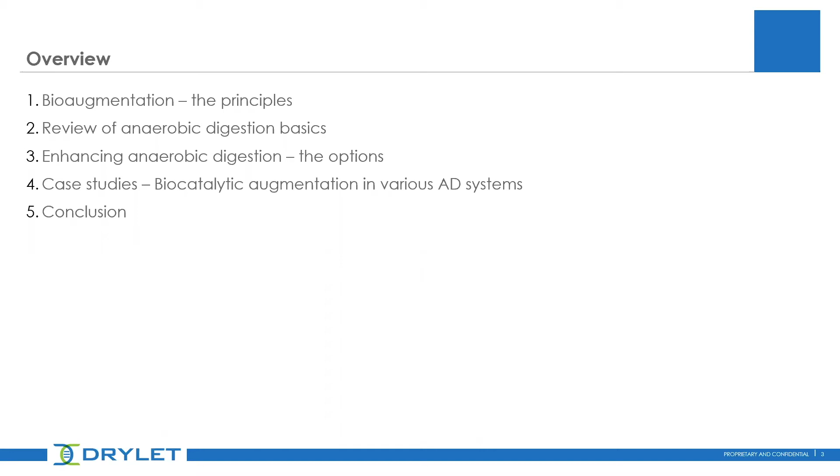The biological remediation of waste is fundamentally the most widely utilized approach for dealing with organic contaminants. Whether we're talking about wastewater treatment or digesters, fundamentally we're starting with a carbon-based waste. If you think about a typical feedstock going into a farm-based digester, it would essentially comprise undigested foods coming from the intestines of an animal, bacterial cells from within the gut, and things like straw, bedding, and feedstock materials that have not been degraded. What's common to all those materials is that they are carbon-based.

All of the carbon-based material that goes into a biologically remediated process relies on microbes to be degraded. In the context of anaerobic digestion, we take the carbon-based waste, expose it to microbes, and in the absence of oxygen, roughly 30 to 60% of the organic material provided is converted into a gas. So for every 100 pounds of feedstock provided to a digester, about 30 to 60 pounds equivalent will be converted to biogas.

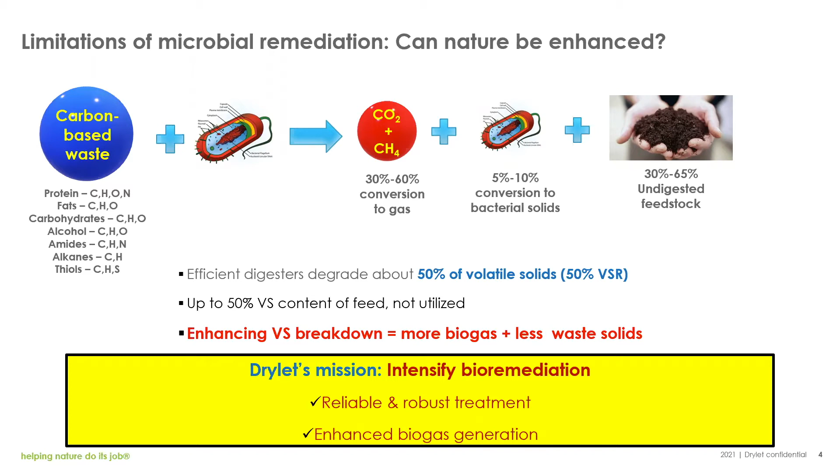So our mission at Drylet has been to fundamentally find ways of intensifying bioremediation, and doing that in a way that ensures we still have reliable and robust treatment while also getting benefits like enhanced biogas generation.

And the need for such solutions is immense. So if we think about the entire gamut, the entire scope, the entire field of sectors that require solutions to the significant amount of solids that they have to deal with.

We're talking about almost 40 billion gallons of wastewater being treated daily, generating roughly 65 billion pounds of sludge. And if we look at the livestock side, there's over 6 trillion gallons of manure, both from swine and cattle, generated on an annual basis.

So finding ways in which we can do more with those solids, break down more of those solids, and make our digesters more efficient and effective would be extremely significant—not just in helping us generate more biogas, but also in providing options for mitigating, reducing, and better handling the significant amounts of solids generated through all these processes.

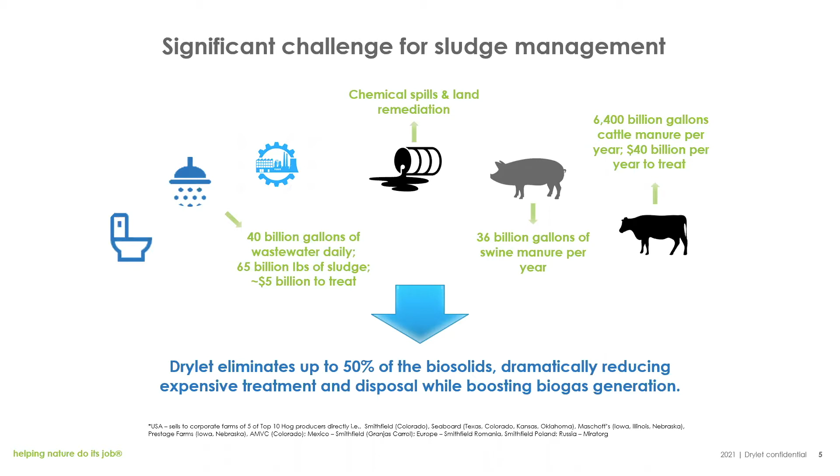If we look at a typical microbial system, there are 8 factors that determine the type of microbes we have. Those factors include the food, which in the context of a farm-based digester we might really have no control over, because the food we get is essentially the waste coming from the animals.

If we think about one place where we could have control over the food, it might be in a brewery, for instance, where we can actually go buy hops and determine exactly what we want to put into the digester, having remarkable control over the food going to the digester.

But in most of the applications I'll be talking about today, we're basically dealing with waste—whether it's biosolids from wastewater, feedstock from digesters, or mixed waste systems taking part feedstock from animal production and things like fats, oils and greases that are then fed to that digester.

But those factors again include the food, the temperature of the system, the hydraulic retention time, and the sludge age, which in many digesters, if they are well mixed, might be the same. So in a well-mixed digester, both the liquid and solid streams spend exactly the same amount of time in the system.

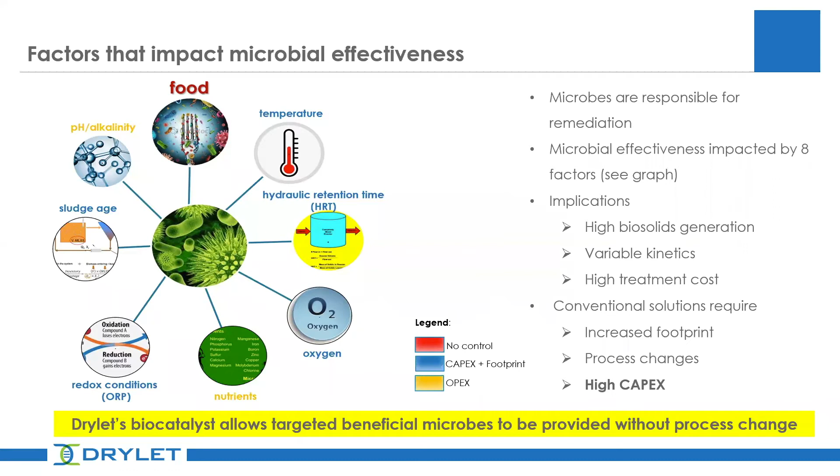That entire process of improving what is going on in a microbiological system, like an anaerobic digester, is called bioremediation. There are different types of bioremediation, but what we'll focus on today is a particular type referred to as bioaugmentation. Drylet's particular focus is on cellular bioaugmentation.

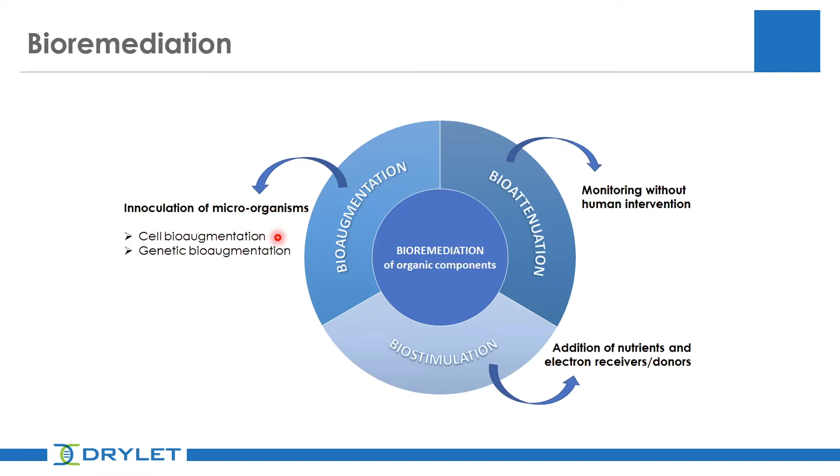This is taking materials found in nature, microbes found in nature that are not modified in any way, and then presenting those microbes on unique platforms, which we'll talk about as we go forward, into a biological system like an anaerobic digester, ensuring that those microbes are viable and provide us with the outcomes we're looking to have in the system.

In principle, a wide variety of microbes can be bio-augmented. So for instance, in a digester we have fermenting microbes that take the waste we put in, break it down, and convert it into volatile fatty acids, which is an extremely important step in the digestion process.

We have methanogens, a unique set of microbes able to take volatile fatty acids, hydrogen, and CO2, and convert them to methane. We have lipophiles, a class of organisms laser focused on breaking down fats, oils, and greases. So just a wide variety of different types of organisms that we could, in principle, load onto a platform and introduce into a biological system.

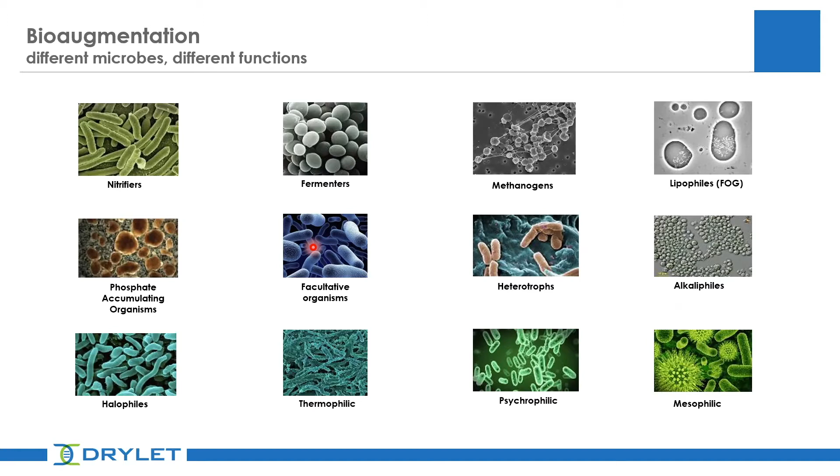Now, if we take microbes that might not be native to a biological system and introduce them into that system, there are three fundamental challenges we have to overcome. The first challenge is: how do these microbes get access to food?

I'll give you a few examples. In a typical digester generating about 250,000 cubic feet of gas a day, that digester might be fed with hundreds of thousands of pounds of solid material. We would typically be dosing into that digester no more than about 10 to 20 pounds of microbes on this platform daily. So how do we enable a very small amount of microbes going into a system with significant quantities of other bacterial cells? How do they even get access to food?

As we'll talk about in subsequent slides, a typical digester dosed with the Drylet Biocatalyst might have about 10 to 20 parts per million of material. When a digester has 2% solids, that's basically 20,000 parts per million. Many of our digesters have as much as 5%, in some cases 7% solids—a 7% solids digester is 70,000 parts per million. So how do we take 10 parts per million of microbes we're dosing into the system and have them compete with 70,000, 20,000, or 50,000 parts per million of other microbes in the system? How do they get access to food?

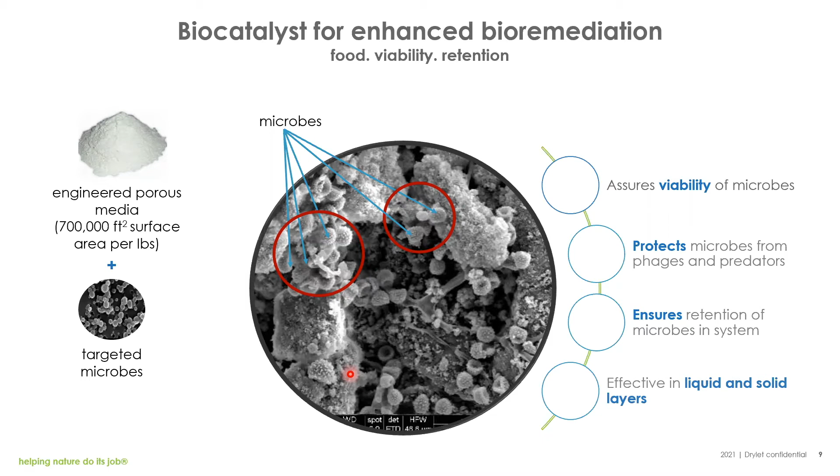If we have a separation between the hydraulic retention time and the solids retention time, the solids retention time tends to be way longer than the hydraulic retention time. This means we're able to retain these particles for longer, reducing the need for significant supplemental dosage, reducing overall cost, and ensuring reliable, predictable outcomes as we move across systems.

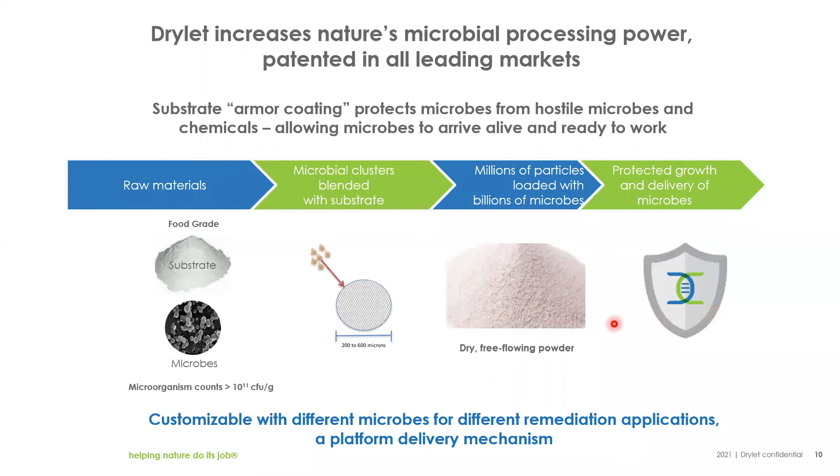In essence, what we do is take microbes, load them on a food grade substrate material, and form products that are 200 to 600 microns in size. The product itself is a dry, free-flowing powder that can be easily and readily dosed—into the feed, or directly into the digester if we have access. We have a platform that protects the microbes and delivers them reliably into any system we're trying to remediate.

Bringing it all together, a pound of the material has 700,000 square feet of surface area, equivalent to 154 basketball courts. By loading the microbes into this media, we enhance their viability, provide increased surface area, and improve physical chemical properties. We ensure the microbes are not killed off by things smaller than them, like viruses, or eaten by things bigger than them, like higher order organisms.

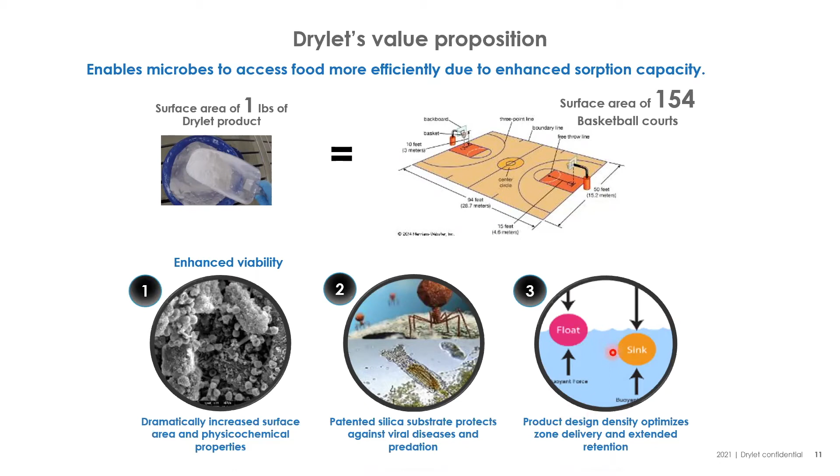And then finally, we're also able to ensure that, because of the size of the media particles, we're able to retain the microbes in the system for systems that might have poor mixing, where you have distinct liquid and solid phases. And if the system is well mixed, then the particles and microbes are able to be well mixed and retained within the system as well.

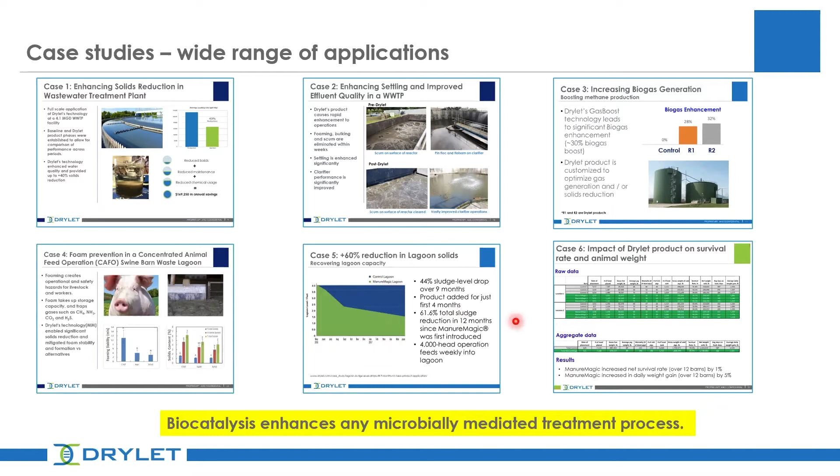Using this technology, we have a variety of applications, both on the wastewater side and on the digestion side. What we'll focus on today is the work we do helping to boost anaerobic digestion. We also do significant work on the livestock side, applying our technology for mitigating foam formation in swine farms, reducing solids accumulated in manure systems and lagoons, and improving overall outcomes in livestock management.

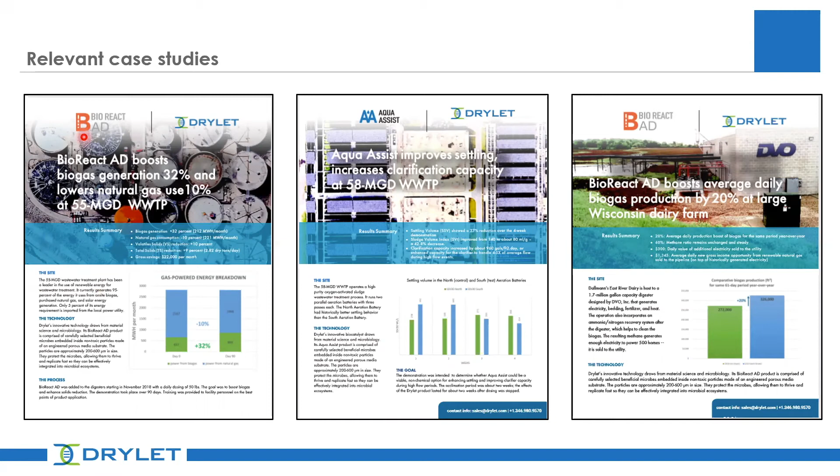Today we'll talk about a number of case studies that address both manure-based, farm-based digesters, as well as relevant examples from municipal and industrial digesters. As a company, Drylet's experience spans a number of different sectors, but our focus today would mostly be on the work we do on the anaerobic digestion and waste-to-energy side.

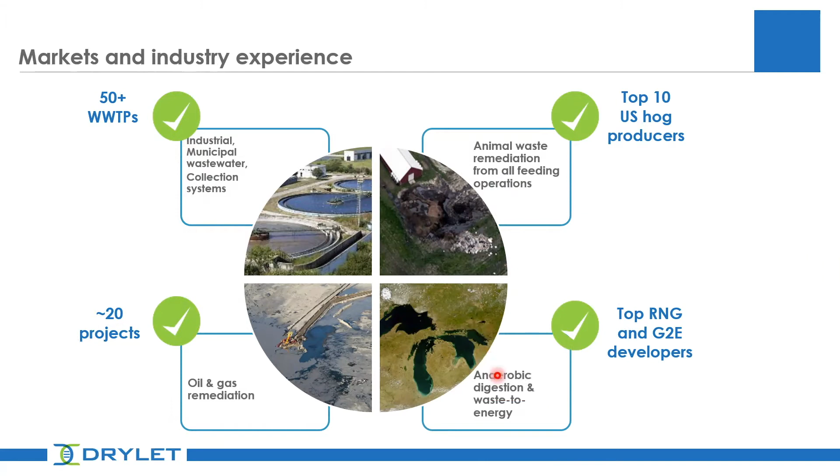We're now going to take a more detailed look at anaerobic digestion. If we look at the anaerobic digestion process, there are 4 distinct steps. The first step is the hydrolysis step.

In the hydrolysis step we're taking solids, whether bedding materials, fats, oils and grease brought in a mixed waste type system, or undigested materials coming from the guts of the animal, or bacterial cells pushed out from the gut of the animal. Manure, the poop from cows or swine, contains about 50% bacterial cells, coming from the gut of the animal. Nothing can eat something that's bigger than itself.

So when we're faced with a steak, the first thing we do is take out the knives and cut that steak down into manageable pieces, no bigger than the size of our mouths. It's the same for bacterial cells. A bacterial cell can only feed on material that is soluble, small enough to go across its cell membrane. And a bacterial cell is about 0.45 to 1 micron in size.

This means we have to take big chunks of material, straw, bedding, fibrous material, and all the bacterial cells pushed out into the manure, and break them down into small pieces, into molecules, into compounds. That is the most difficult process in anaerobic digestion. The hydrolysis step tends to be the rate-limiting step in most digesters, taking those big chunks, whether big in terms of size or in terms of the complexity of the molecules, and breaking them down.

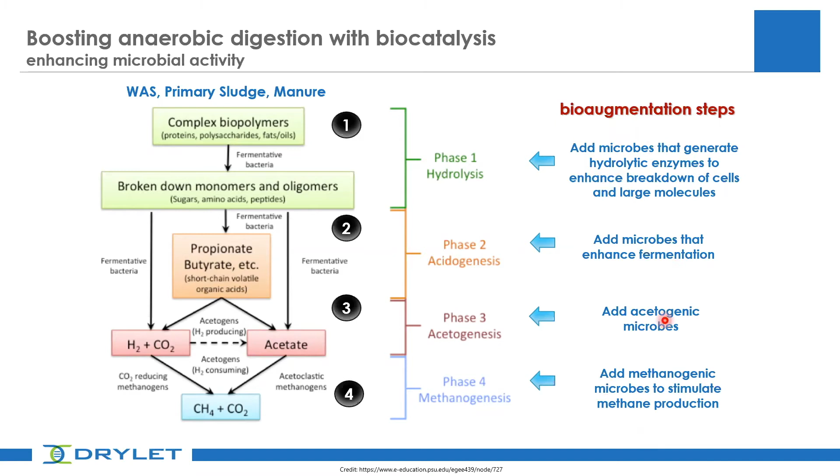If we take a closer look at hydrolysis, we begin to get a sense for why hydrolysis is extremely difficult. There are typically two types of solids going into a digester. On the one hand, you have materials that have long chain molecules, since every food eventually breaks down into being either a carbohydrate, a fat, a protein, or maybe, in the context of things like straw, lignin material.

The challenge we have with those long chain molecules is we need to break them down, we need to cleave them. Why do we need to do that? We need to get them small enough that they can actually pass through the walls of a bacterial cell, because without passing through those walls, the bacterial cell can't feed on them. That's the fundamental challenge: taking those long chain molecules and breaking them down.

The challenge with biological cells and plant cells is even more challenging. If you take a bacterial cell, for example, as I indicated, 50% of the solids in manure coming straight out of the cow are bacterial cells. The challenge there is that there are carbohydrates, proteins, and fats, but they are all encased inside the cell wall. So before we can even access the food to start breaking it down, we have the task of breaking that cell wall. We have to lyse the cell before we can access the food and start cleaving it up and breaking it down.

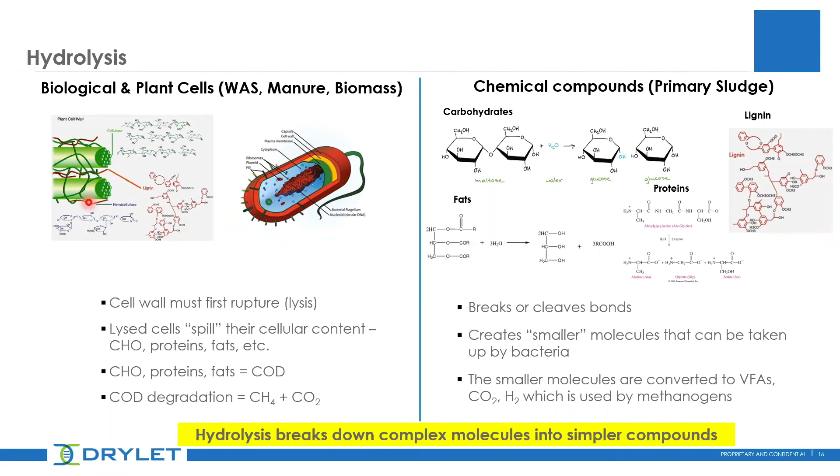So oftentimes, when we say something has a 50% volatile solids reduction, what we're really saying is that the primary solid fraction, the fraction that is just breaking up the long chain molecules, we typically see as much as 60 to 80% volatile solids reduction of that fraction. The more difficult to reach fraction is where we have bacterial cell walls or plant cell walls, and oftentimes we have less than about 40% of that fraction of the solids actually being degraded.

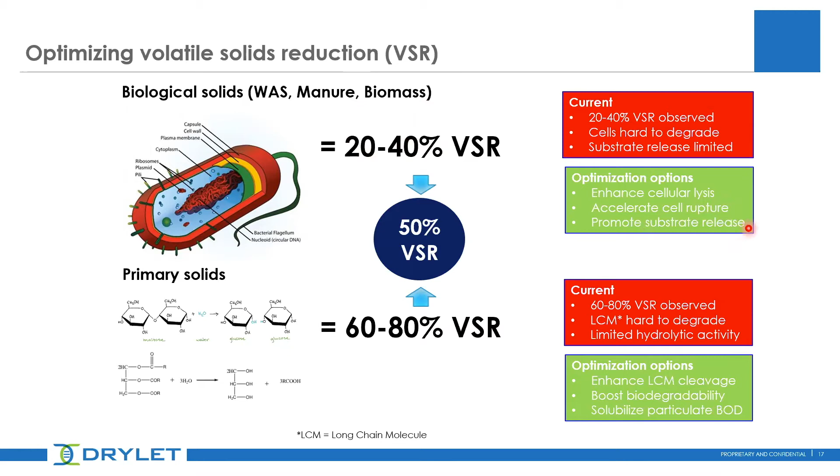If we were to improve the hydrolysis of this hard to degrade fraction, then what we're looking for are ways that we can enhance cell lysis, rupture the cells, and promote the release of their contents. There are different ways we could do that. We can take a bacterial cell and just mash it up, subject it to pressure, increase the temperature, stress that cell. We know that anytime we stress a cell enough, we can rip it apart and release its cellular content. The same thing for plant cells.

We can take that lignocellulosic material, that fiber, and mash it up, subject it to heat, subject it to harsh chemicals, all in an attempt to break down that cell wall.

The challenge with that is, even though these techniques work, they will also affect other classes of microbes in the system. Not only will they make the food more available, but they will also affect the microbes that do hydrolysis, the microbes that do fermentation, and our methanogens, because all of these microbes are highly sensitive. Anything that improves cell lysis is also going to affect all of these microbes whose health we want to retain in the system.

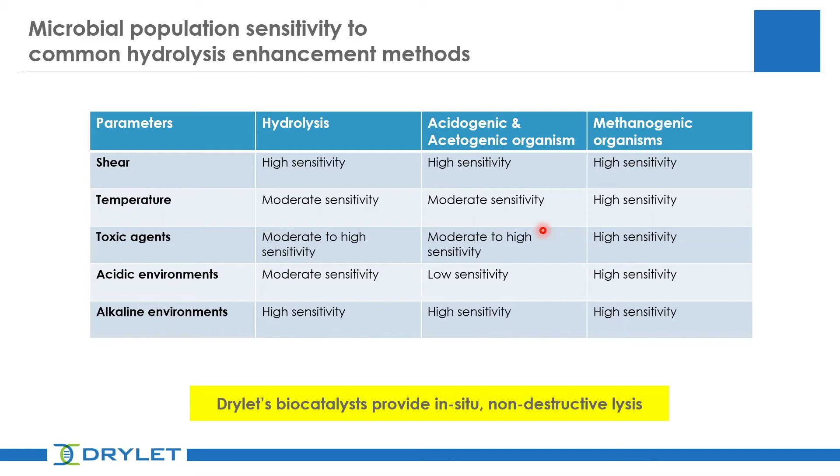So what we often need in that situation is an approach that can be provided in situ and that does non-destructive lysis. For those on the call who have experience with this, there are technologies like thermal hydrolysis, pressure homogenization, chemical hydrolysis, and ultrasound that can be applied as pre-treatment steps.

They are typically never attached to the digester because they are indiscriminate technologies that can affect all cells. But oftentimes what these technologies are used to do is to make the food more available, to break down the solids, to lyse the cells.

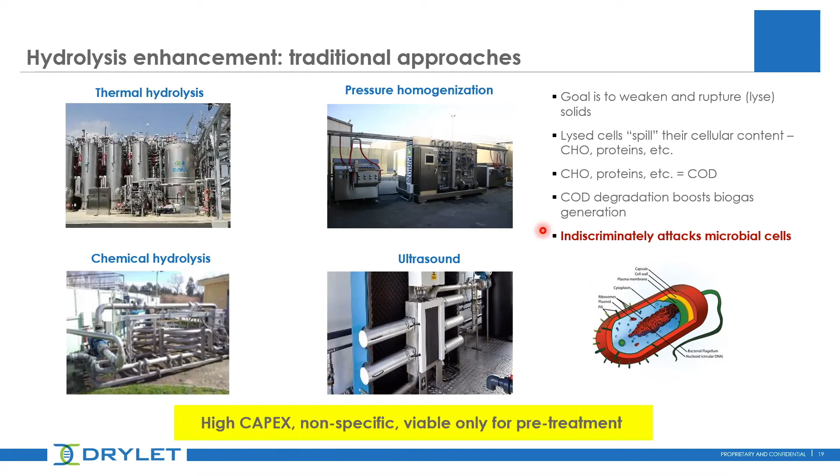Our approach at Drylet is to ask, are there ways we can actually do this and get the same types of outcomes but just leverage microbes? Because microbes are extremely effective. And if we can find the right microbes and ensure they can survive within the context of a digester, then we have a chance at delivering these solutions in a way that can be targeted and coupled directly to the digester, without requiring significant capex, and in our case, without requiring any capex at all.

The approach we take is threefold. One, our solutions are always data-driven. We typically start with the operational data about the digester, looking at things like the solids retention time, the specific gas generation in the digester, which is the cubic feet of gas generated per pound of volatile solids removed, and factors like the amount of volatile solids destruction currently being achieved in the digester. In some cases, a very few number of cases, we might even look at the microbial landscape.

If we look at the data and there's an indication of something like inhibition of methanogens, we might do a more detailed look into that. But 95% of the digesters we look at, we typically don't need to do that, because the issues with the digesters are clear. It's normally a limitation in hydrolysis.

The final step is we determine how much biocatalyst we need, based simply on how much more incremental gas we're trying to get. We typically dose a pound of our material for every 5,000 cubic feet of incremental gas. So if we went into a system and wanted to increase gas generation by 10,000 cubic feet a day, that would be 2 pounds of biocatalyst being dosed into that digester on a daily basis.

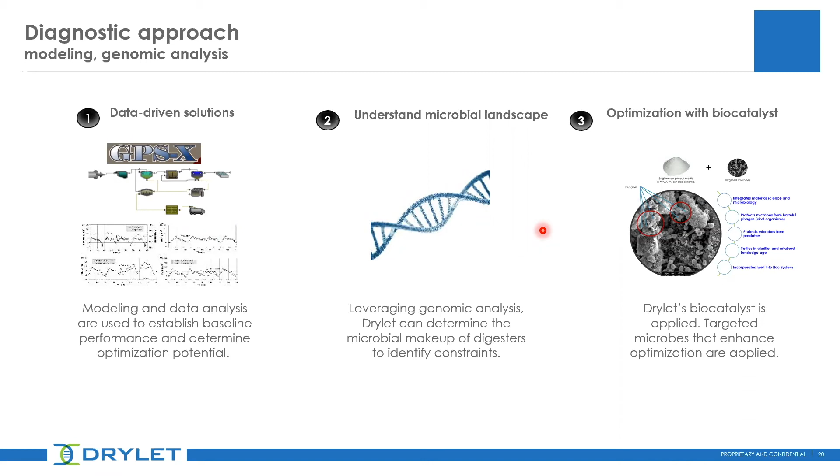We've worked across every conceivable type of digestion process, starting with plug flow systems, which are very common in Wisconsin with the DVO style systems, to partial mix lagoon systems, not so common in Wisconsin, probably because of temperature limitations, but very common in warmer parts of the country, very common in California, quite common interestingly in places like Missouri, and very common in Texas. These are basically just holes in the ground, lucky if we have any mixing.

In these systems you actually have a three-phase system. Three phases in the sense that you have a scum layer, crud. Fats and oils have a lower specific gravity than water, so any fats or oils in the system tend to float right away to the surface, and it thickens and hardens over time. These systems can be, in many cases, 5 to 6 feet deep in this particular layer. You have the liquid layer, and then you have the solids layer at the bottom. This solids layer would comprise both settled material that has accumulated over time, as well as heavier fresh material coming in the influent.

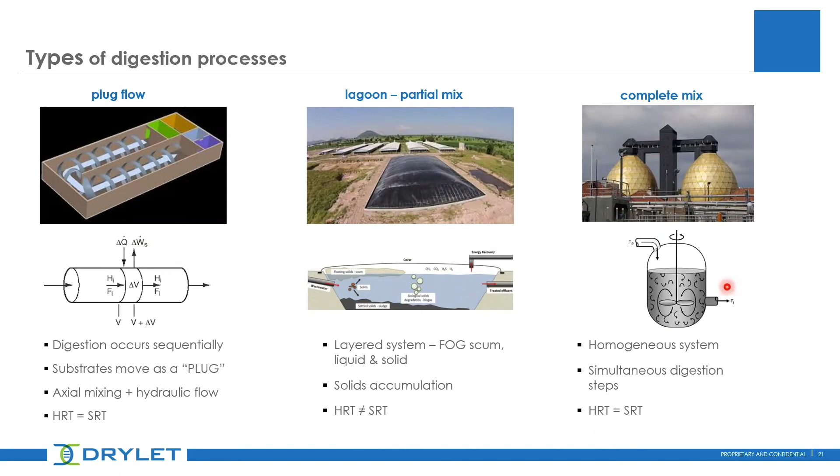So the particular challenge you have in a partial mix system is ensuring you have a product that's able to address both the sludge layer at the bottom, a crust at the top, as well as a significant liquid layer that still contains the digestate and material you still want to degrade. And then we have complete mix systems, which are very common on the municipal wastewater side.

This is a picture of what our technology is able to do. All the technologies you see put up here would typically require significant capital expense. In the case of thermal hydrolysis, for example, all we're doing is taking those cells we want to rupture and subjecting them to temperatures higher than the boiling point of water. Why do we do that? We know those cells, whether bacterial or plant-based, typically have about 90 to 95% water. So if we heat those cells to temperatures higher than the boiling point of water, we can actually make them explode from the inside out.

Then in thermal hydrolysis, we raise the pressure.

We raise the pressure to anywhere between 10 to 15, in some cases to 30 times atmospheric pressure. What does that do? It allows us to collapse those cells on themselves. As you would imagine, we need specialized equipment, temperature, heat, and capex.

Pressure homogenization does the same thing. It increases the pressure to, in many cases, almost 2,000 times atmospheric pressure. But the goal of all these systems is to stress the cell and rip that cell open. They can be quite expensive.

What you're seeing on the far right here is actually our technology being dosed into a digester. In this case, this is a municipal digester, and what you're seeing in the picture on top is the material being dosed into the thickened sludge overflow. So in this particular plant, they have a thickened sludge overflow, and we're dosing the material into that thickened sludge as it makes its way into the digester.

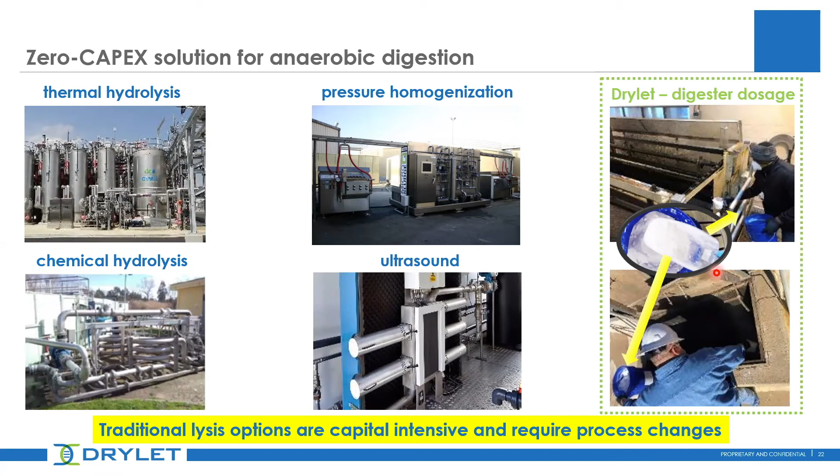We've worked across a variety of digestion systems, both municipal plants and industrial facilities like rendering plants dealing with different types of high strength wastes, as well as dairy, cattle, and swine. We'll go into a few specific examples.

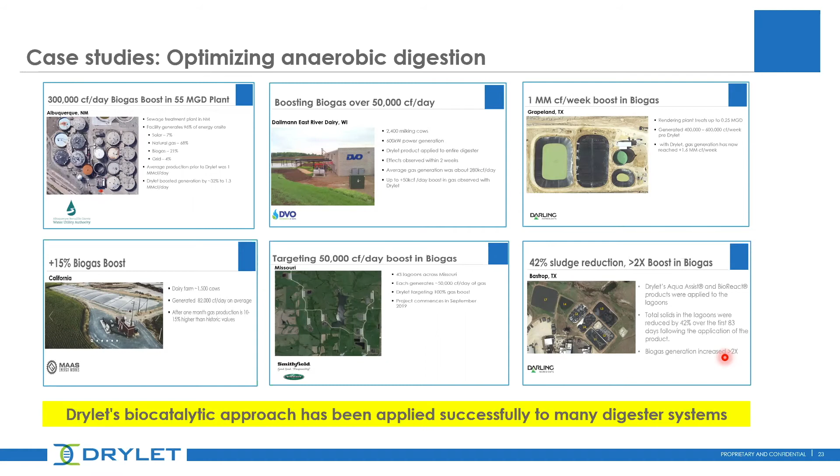In this particular example, it's a 55 million gallon a day sewage facility, and they generate about 1 million cubic feet of gas a day. We dosed about 50 pounds of the material daily into this system, and they were able to get an increment of about 300,000 cubic feet a day of gas. That is about 6,000 cubic feet for every pound of product dosed into the system.

We typically begin seeing results within about one sludge age. In this case, this plant had a 20-day solid retention time, well mixed, completely mixed digester, and they were able to start seeing results within about a 20-day time frame. So we normally expect to start seeing results within about one sludge age, which in this case was about 20 days. So within 1 to 2 sludge ages, we expect to begin to see results in the system.

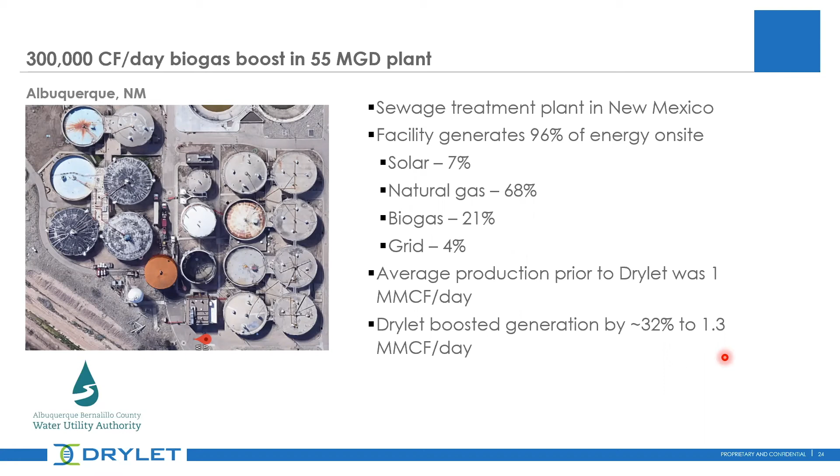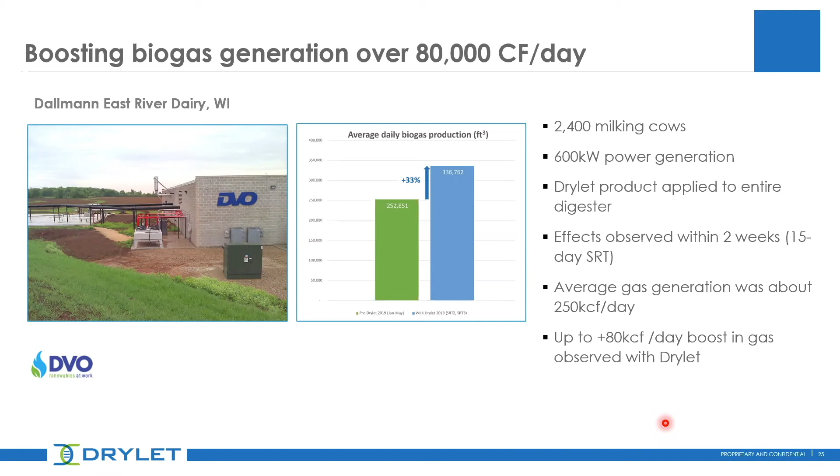That number had increased about 33% to close to 340,000 cubic feet of gas a day. So they got an increment of 80,000 cubic feet of gas a day by dosing the equivalent of 16 pounds a day of material. So a pound of material basically gave them close to about 5,000 incremental cubic feet of gas. We started observing results here within about a 15 to 20-day time frame. This particular digester had a 15-day solids retention time.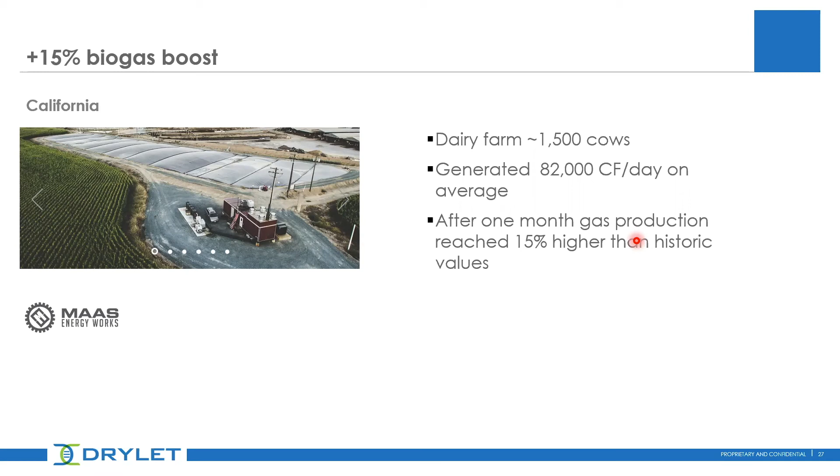So very quickly, I'll walk through a few things of interest. One major question would be, if we increased gas generation, does an increase in gas translate into an increase in the energy content of the gas? The answer is yes. So this is the example of the plant where we were generating about 1 million cubic feet of gas a day, and we went to an increase of over 30%. In that particular plant, they were generating power using biogas.

What you can see here is in this first portion, the first two charts, they went from 657 megawatt hours per month from biogas to generating 869 megawatt hours per month from biogas. As you might recall, that plant also generated energy from a number of other sources. The increase in gas was roughly about 30%, and the increase in energy is within the same range. So yes, an increase in gas would translate into a similar level of increase in energy content.

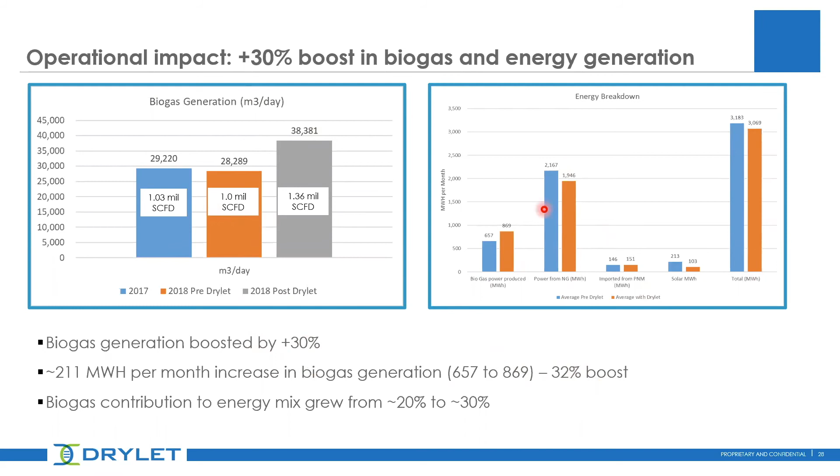As you might imagine, when you actually look at the gas composition, the blue represents the pre-Drylet period, the red represents the period with the use of our product. You can see that both in terms of methane content and carbon dioxide content, the composition of the biogas essentially isn't changing.

One of the things we typically observe, not something we see all the time but in a number of our applications, is that the H2S levels also tend to reduce as well.

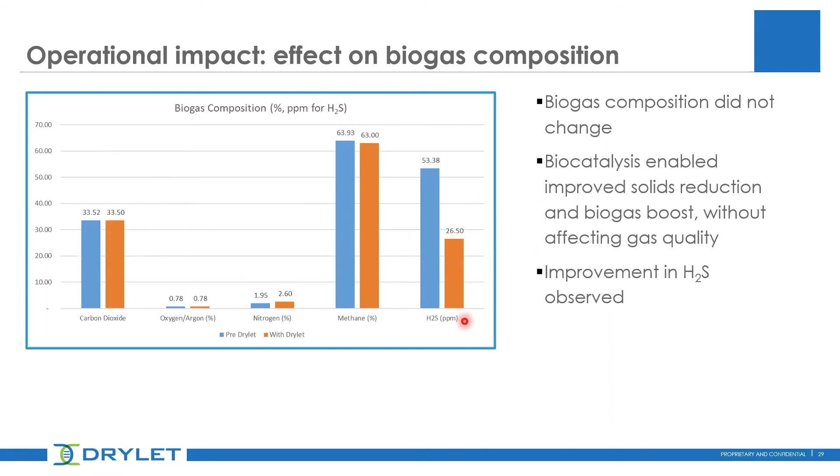We have applied our technology across a broad range of systems. We've worked with complete mix, plug flow, and partial mix type digesters. We've worked with a variety of different substrates, from single substrates like biosolids on the wastewater side, to dairy systems where the feed is 100% from dairy operations, to systems with mixed waste, where dairy or livestock-based manure is only 10-20%, and those farms bring in other materials to subsidize the cost of operating the digesters.

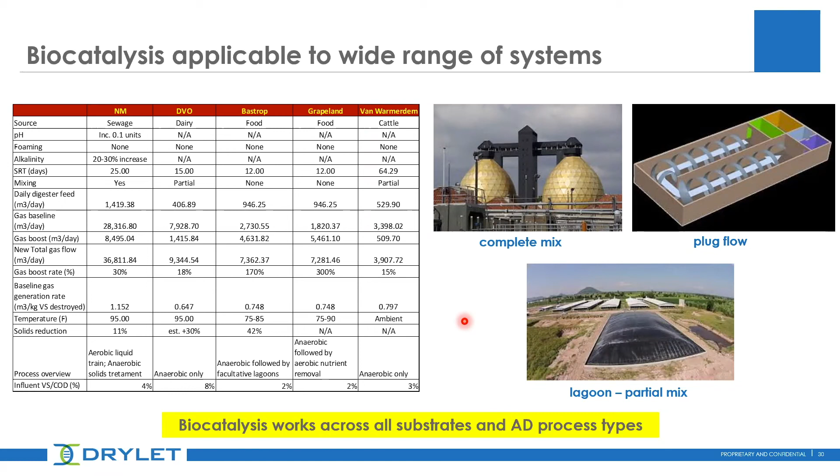We typically don't see that in places like Wisconsin. We see quite a bit of it in places like Massachusetts and Connecticut, where the subsidies and incentive structures are different, and where the incentive is really about green energy—that's what the farms are incentivized to focus on.

In terms of costs, different types of gas from different feedstocks have different values in different programs. Whether you're talking about the RFS program with the EPA or the LCFS program, there's a range of value for the gas being generated. What we've done here is the slide on the left, borrowed from Blue Source, shows the different levels of value you can get for different programs, depending on things like your RIN designations, as well as the CI scores and credits associated with your system and program.

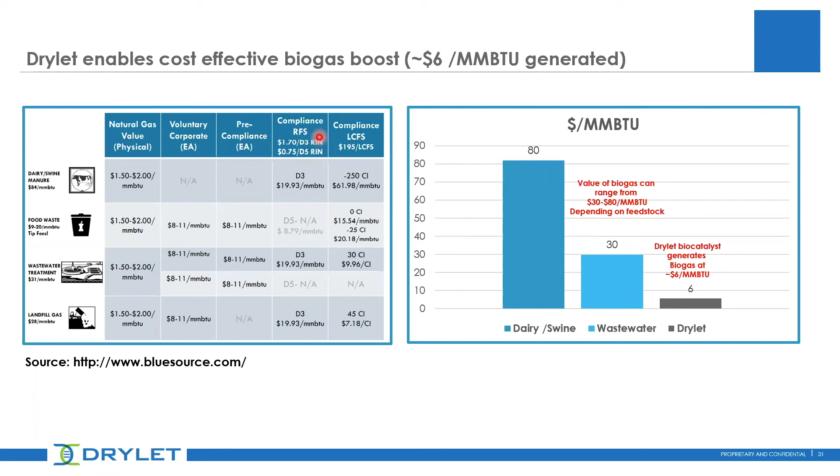We've compared that to what it would typically cost to generate one MMBTU unit with the use of the Drylet biocatalyst. What you can see here is that it would typically cost somewhere in the region of $6 per MMBTU to generate an incremental unit of MMBTUs by adding a biocatalyst. That compares favorably to the potential value you can get if you had a digester that was perhaps part of an RFS and LCFS program.

This next slide gives you a sense for the mechanism. So we dose a pound of material. That pound of material breaks down an incremental 500 pounds of solids. We know that you're generating about 10 to 15 cubic feet of gas for every pound of solids you reduce. So a pound of material immediately translates into about 5,000 to 7,500 cubic feet of incremental biogas.

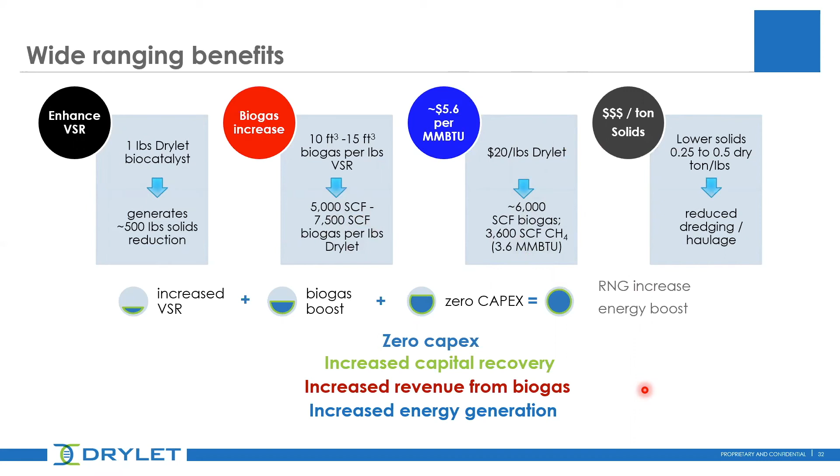As we've indicated, when you look at that in the context of the cost of the biocatalyst itself and the incremental gas it is generating, you work it out that you're looking typically at somewhere in the region of $6 and less per MMBTU of incremental gas generated. The critical thing, very important to note, is there is no capex. There's no pump, no pipe, nothing that changes in the system. All you're doing is dosing this biocatalyst into the process.

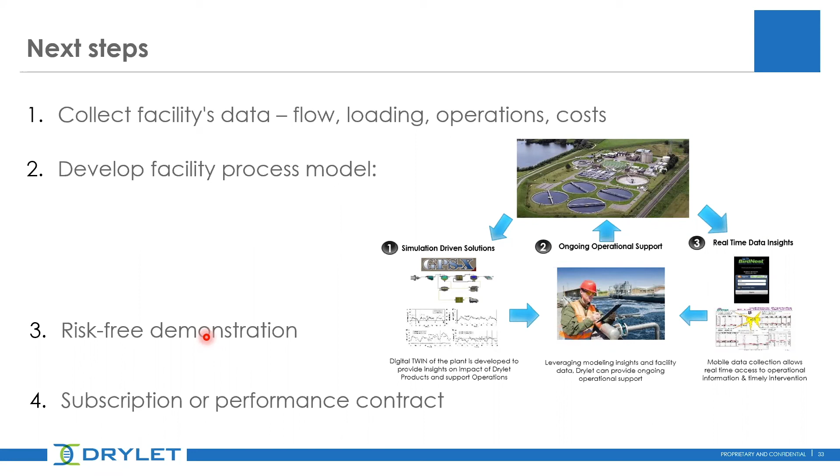How do we work? Everything we do is data-driven. We're starting with facility data. We take that data, analyze it. It allows us to come up with a model of the plant, to understand what's going on in the plant. In many cases, we then do a risk-free demonstration. We're able to determine the increment that the plant can get and the potential economic value of that. This allows us to work with the operator to demonstrate the value of the product in a way that doesn't put them at technical or economic risk. Then we typically would move forward to some type of business approach.

To summarize, we have demonstrated over the last few years that biocatalytic augmentation can be a viable, robust, reliable, replicable way of enhancing biogas generation. As long as a system has less than 60% volatile solids reduction, which is almost 100% of livestock-based digesters, then we believe that there's actually an enhancement that can be provided by biocatalysis.

The benefits are reduced operating expenses, and an enhancement to revenue-generating units like biogas. For somebody that has built a system where they expected maybe a 50% volatile solids reduction or less, by doing nothing more, by investing in no more capital expense, you can actually get more out of that system.

One of the things we need to consider is if your digesters are in the RFS or the LCFS program, we need to consider what the implications are of increased gas generation with regards to the overall CI scores and other units of performance and value relevant to the program.

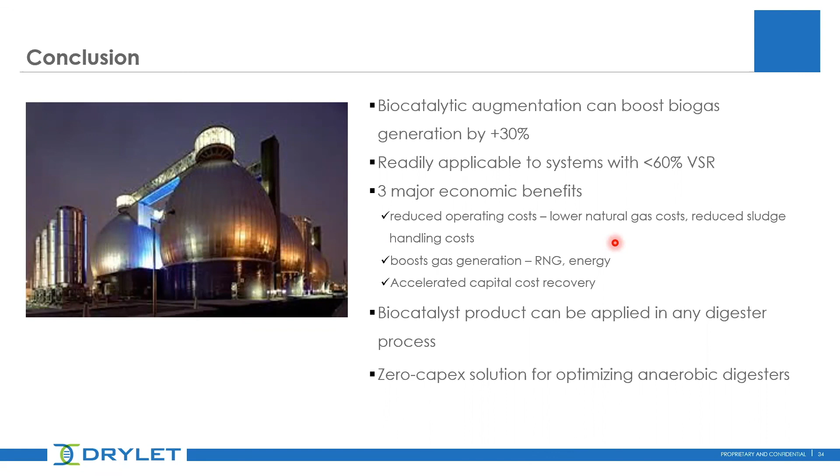The approach can be applied to any type of digester. And again, it bears emphasizing that it's a zero CAPEX solution that allows us to do more with our existing assets. Thank you, and I believe we have just a little bit of time for some questions.